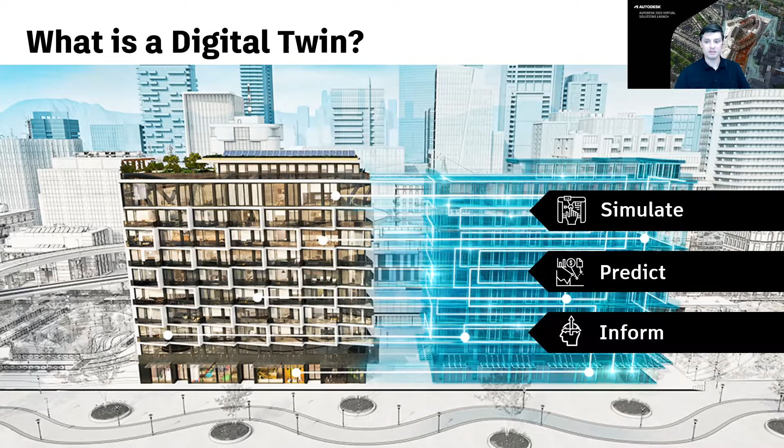As we think about a digital twin, they ultimately possess the opportunity to transform the built asset lifecycle. We can effectively transform that by tracking a digital thread of information that links various silos of data today, and ultimately connects operational data through an end-to-end digital process spanning capital planning, architecture and engineering, construction, and asset management.

By connecting through this digital thread, we think about the history of any given asset, space, or system within a facility and how we can leverage that history to drill into specific analytics, provide insights, and ultimately leverage this information across an entire portfolio or capital program to improve overall performance.

With that in mind, we think about things like: is my facility achieving the sustainability goals that I have set in place? And if not, what can I do to correct my course?

For particular systems, equipment, or material, are they performing based on the specified performance, and if not, are there other components similar or like in my overall portfolio? And what can I do to really future-proof any planning and ultimately optimize my ROI as I think about hitting my goals across a portfolio?

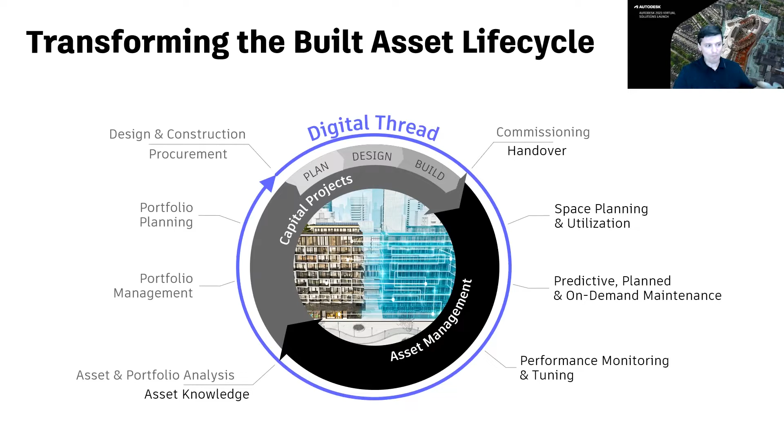As we started the Tandem incubation project, we looked across the industry for different information about how digital twins are leveraged and where the industry is with the adoption of digital twin technology.

To start, the descriptive digital twin possesses the as-built information related to the facility, coming from design and construction information. This is a collection of data that's captured through that design and construction workflow, and ultimately provided as part of that digital handover—that as-built documentation.

It is an editable version of that information, and ultimately you have the ability to maintain that through the life of the asset. It simply needs to be a collection of models that contain the assets or equipment, the spaces, the systems that are associated, and then you have the ability to manage the asset information requirement structure within that construct.

As we step up to informative twins, this begins to incorporate sensor information, IoT devices, and other connected components that bring in operational data, time series data, or event information, or otherwise, into the digital twin ecosystem, making them a single pane of glass.

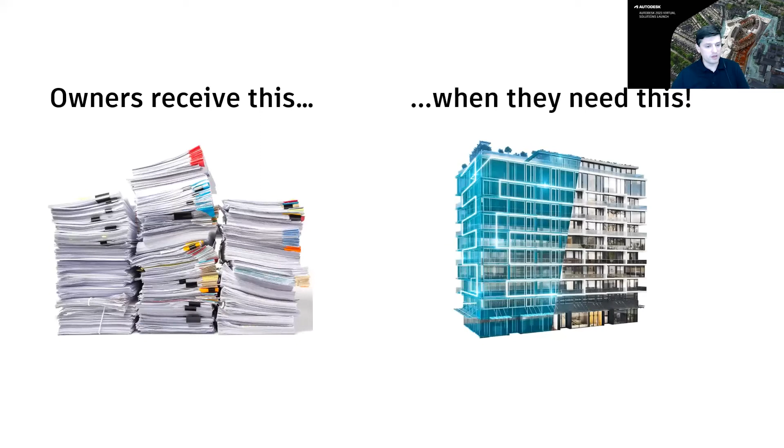Generally, when we think about that descriptive twin and the starting point, we frequently see that owners today receive a stack of unorganized or chaotic documents structured in a way that the construction team or delivery team handed them over, whether they're physically paper or digital paper in the form of large bound PDF documents that are disorganized and provided on a flash drive or otherwise.

As we think about handover in the sense of leveraging industry standards and structuring that data within a digital twin environment, we want to build a repeatable process leveraging them to transition that data into FM solutions or CMMS or otherwise capabilities. We'd like to see that materialized within the digital twin ecosystem, where today it generally is not. At handover, those mountains of documents are insurmountable or ultimately provide challenges in terms of operational readiness and leveraging that information from day one.

Typically, this is with a lack of transparency and provides poor insights into the asset performance for a long period of time until they can get up and running with that information.

With Tandem, we specifically set out an objective to create a solution organized around three key principles. First of which is accelerating operational readiness by starting with the end in mind, harnessing the BIM process to provide that digital handover, and create that digital twin.

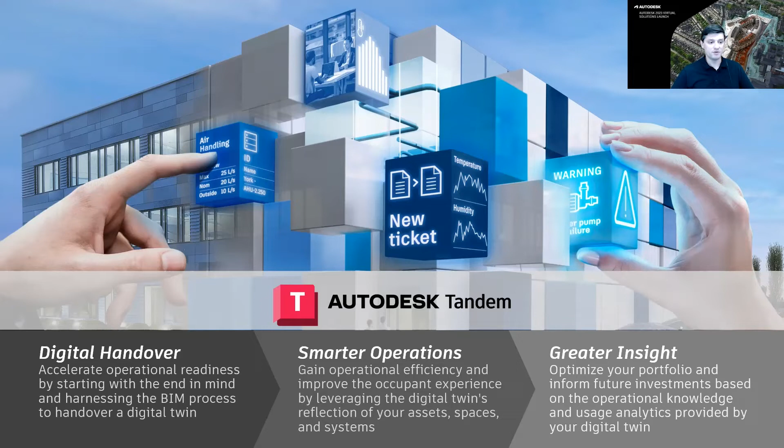Longer term, we expect to optimize portfolio performance by ultimately leveraging that analytical capability of a digital twin to inform future investments and drive further success with the utilization of digital twins.

Over the course of the past 18 months or so, our team has been focused pretty exclusively on that digital handover scenario. The way we think about this is start digital, stay digital, and deliver digital.

If we think about making a digital twin in today's collection of tools or in today's world, frequently this is a very bespoke process. With this digital handover capability and working with an existing BIM procedure, we would expect that a digital twin becomes a highly repeatable natural output from the project lifecycle.

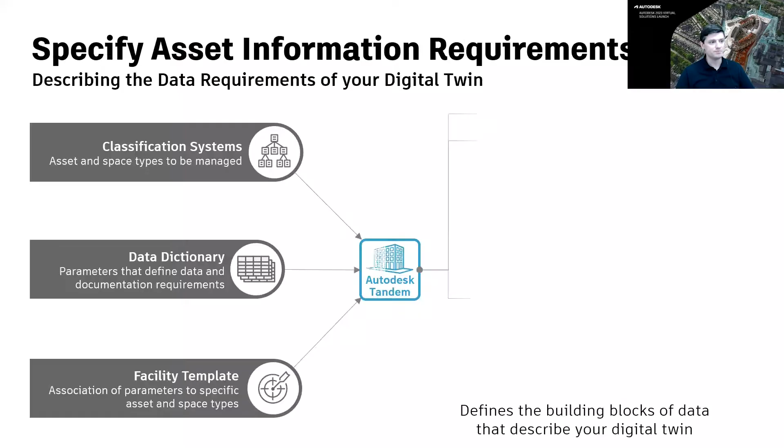So in Tandem, it all starts with specifying the asset information requirements of the digital twin. The first step is actually defining the asset breakdown structure and ultimately organizing that based on either a standard classification system, such as MasterFormat, Uniformat, or Uniclass structure, and those are typically how you're organizing design and construction specifications in today's world within the delivery phase.

Or that can be structured based on a custom classification system based specifically on the client's needs, or possibly even a legacy CMMS or IWMS solution.

Second, we're leveraging and extending a data dictionary, or a set of parameters as a library, that defines what needs to be managed within the digital twin. This can include simple values such as an installer's name or manufacturer's name, document links such as a connection to a warranty document or an O&M manual, or ultimately outcomes or specific values or metrics that you'd like to include with a given asset. With this, standards such as COBie or Building Smart Data Dictionary can be leveraged and structured in a way within Tandem that provides a foundation for those delivery requirements.

And lastly, within our facility template process, you can organize multiple templates that apply to multiple different constructs, allowing your team to deliver against specific facility templates, either for specific clients or specific building types that they can leverage again and again. Note that each of these constructs are reusable across facilities, and we also revision or version each classification system, each parameter, and each facility template, allowing you to deploy them over a period of time with multiple versions in given facilities as appropriate.

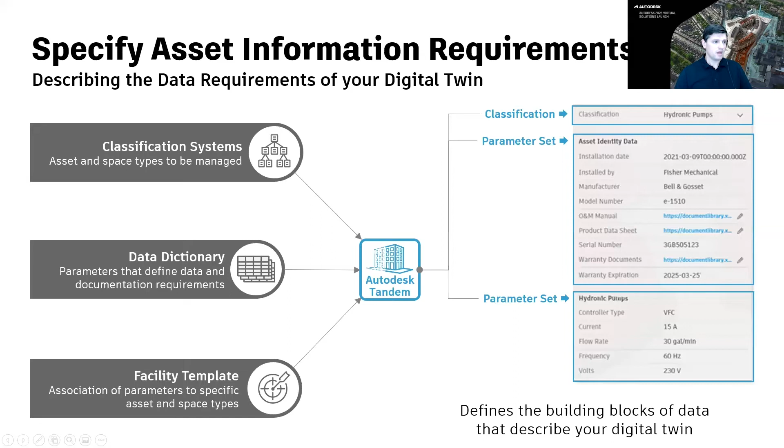As we think about that data capture, we ultimately expect this to be a broad funnel of information coming from a broad delivery team, and ultimately meeting the needs of a broader use case or utilization team that's spread across potentially facilities management, space planning, and operational workflows.

When we think about this structure within Tandem, it starts with that design intent, and it begins to build upon the as-built information and the commissioning data. And ultimately, as we think about verifying completeness of an asset, a space, or a system, we think about the requirements that were specified and how we ultimately go about capturing this through that delivery phase to ensure that that digital handover workflow is comprehensive.

So within Tandem, we do start with the foundation of BIM, or ultimately a collection of Revit or IFC models today. And we support those formats and expect to expand in the future, but that is going to provide the foundation of how we structure additional information.

As we think about capturing documentation or data, we ultimately interact with our common data environment, Autodesk Docs, and from there, BIM Collaborate, or BIM Collaborate Pro. And then lastly, as we think about capturing that installation and commissioning data, we have Exchange with Excel and the ability to interact either directly within Excel with that Tandem data, or an export-import process to and from Excel.

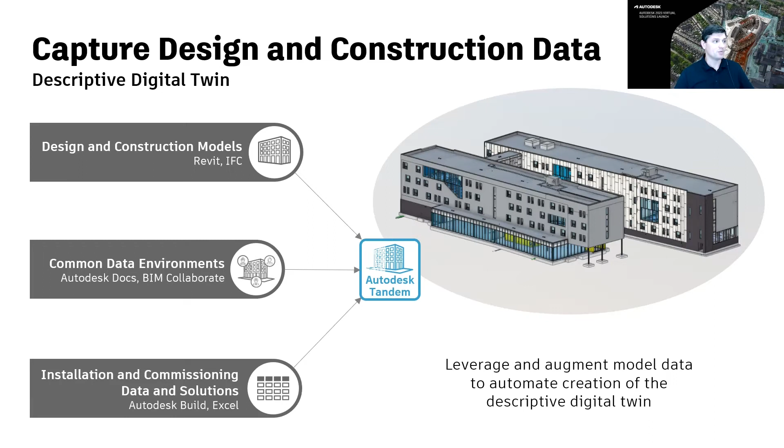As I previously mentioned, that structure of an asset information model is this description or association of assets to spaces and systems, or the relationship between assets, spaces, and systems. And within a given facility, this is important when we think about connecting to downstream operational systems like IoT devices.

Or ultimately digital twin ecosystem solutions such as Microsoft Azure, where it's important that we understand the ontology and the relationships between these things so that I can ultimately drill into a specific building graph and navigate upstream or downstream within a system when a space is too hot or too cold, and I need to understand potentially the impact from failing equipment or otherwise.

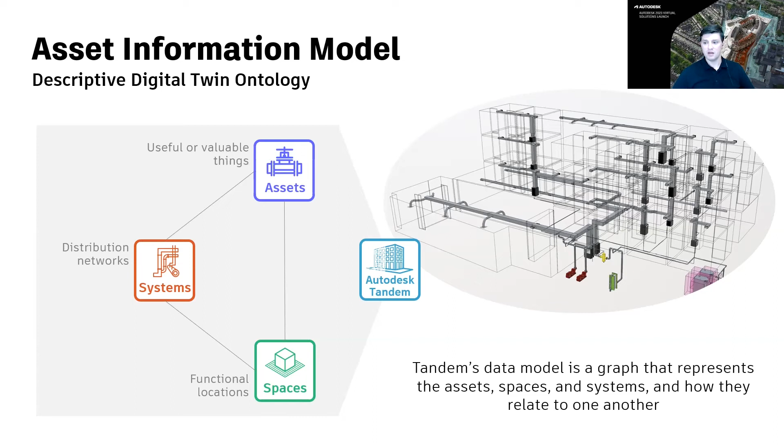With a building ontology, we're able to define that in an automated way. And with Tandem, we're working toward direct association and automation in how we think about assets associated to a space they're located within, and then ultimately the connection across the system and how those things are connected, so our users can navigate within that system to understand that relationship.

As we work to structure that descriptive digital twin as a foundation, this then shifts into how we'll put, in the next coming months, our focus into defining connected operational solutions and how we incorporate data from those operational systems into Tandem. So far we've talked about that context, and now we'll look at the connections made to drive digital twin use cases.

Within Tandem, we'll ultimately create these connections by linking our asset spaces or systems to operational data. We don't intend to replace existing operational systems or build our own IoT platform. Ultimately, we would expect to make connections to those existing solutions and open up or expose the Tandem information through a broader API, broader interaction in that sense.

With that in mind, we will work with popular maintenance management systems, building management ecosystems, IoT devices, and other operational data sets. Through these connections, we'll bring in real-time and historic information of that operational data, and we'll deliver that in a single pane of glass for monitoring and operating your facility. Our goal is creating an informative twin by correlating these discrete data silos and leveraging that in context to create actionable insights.

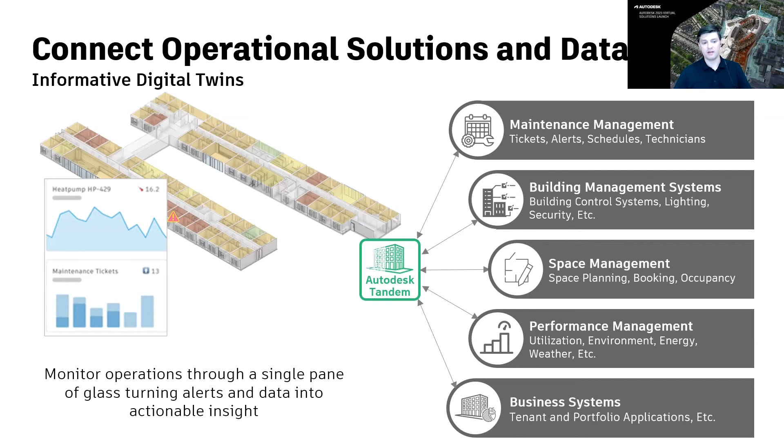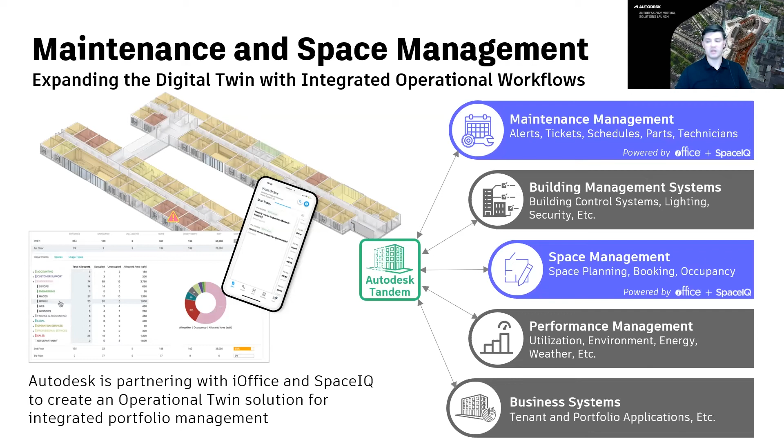With this in mind, last fall, Autodesk established a partnership with iOffice and SpaceIQ, which you may have heard through recent announcements. For customers of their solutions, we'd expect to build workflows with these directly and work with this partner to offer an integrated maintenance and space management solution through that Tandem experience.

Lastly, as we think about moving further into the future with Autodesk Tandem, we'll leverage that data to begin creating or enabling predictive twin, and that predictive capability set allows for analysis of desired outcomes against actual maintenance events and facility performance. Ultimately, Autodesk Tandem will be able to report against that asset, space, or system and how it's performing against expectations, whether better or worse than expected, and then allow our users to drill in and look at corrective course of action to improve that facility performance.

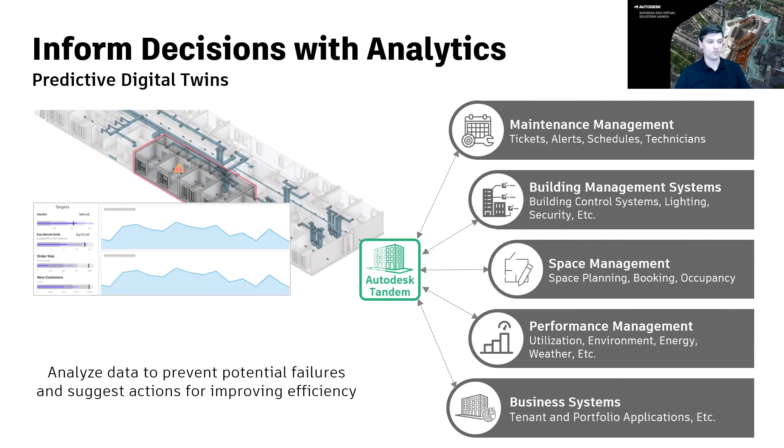To quickly wrap up, we'll step through a really quick demo and then our roadmap discussion. So quickly in Tandem, as we think about aggregating information within our ecosystem, it is a collection or federation of models.

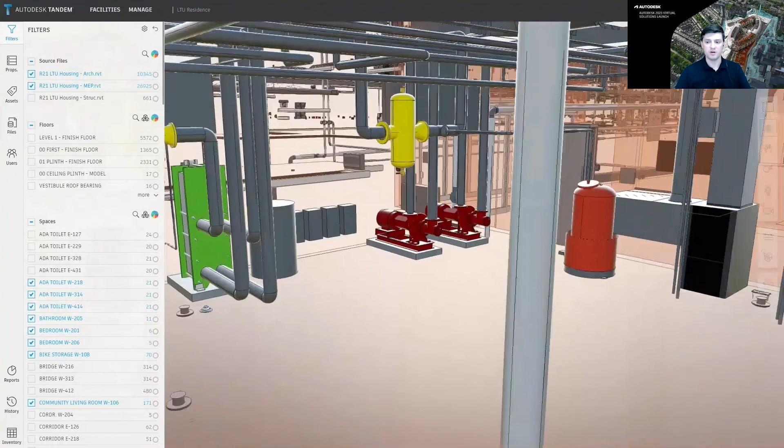From there, I can interact with individual components, search through that property data, specifically drill in on components and look at a diagram or otherwise, maintenance manual, et cetera, and then step out to associated equipment or systems and review performance across that system.

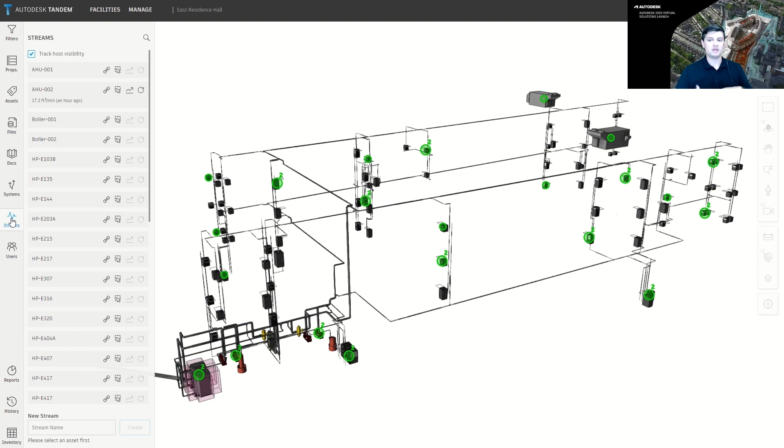As we think about connecting to that operational data, I have the ability to review that information and step through it over a period of time, or ultimately look at the history of that, searching for anomalies and making correlations as we look at that in context.

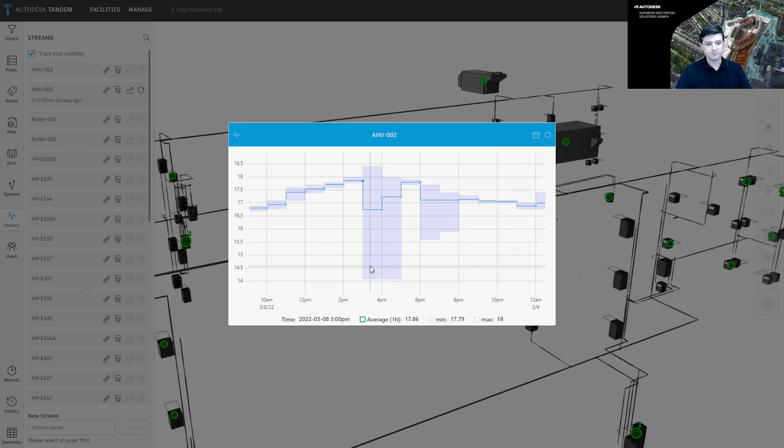As this information is connected and we have the ability to detect those anomalies, our connections to a maintenance management solution would trigger or fire off a ticket to ultimately deploy my facilities team to address the appropriate issue.

With the last two quick slides, we're going to step through our roadmap and our API structure here. With Tandem, as I described, our focus over the past has been on this descriptive twin, or twin building capabilities around structuring, gathering, and ultimately managing your facility data.

As we move into the near future, we're thinking about the process and developing our informative twin, for facility monitoring, simplifying that user experience for operations professionals, and driving to specific interactions with that set of insights. Then lastly, we'll move into that predictive twin capability, where we're thinking about rolling up data across a portfolio of facilities and providing analytics or insights to drive actions.

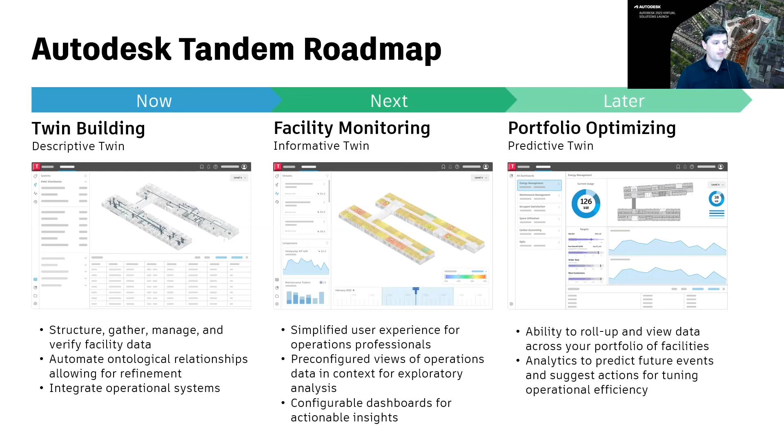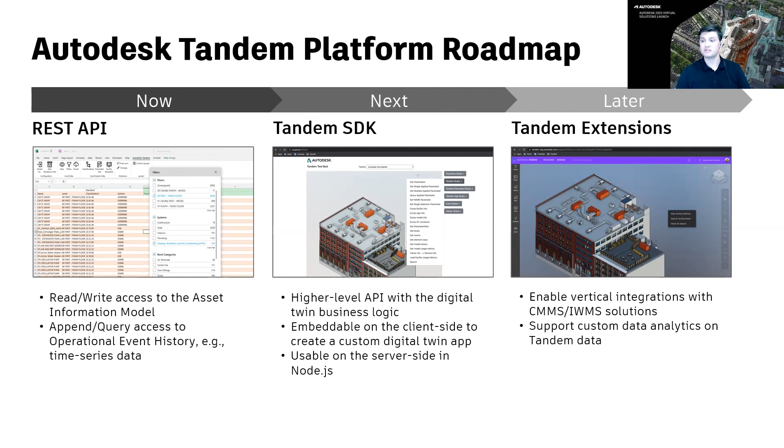With this in mind, we have a similar structure for our APIs, where today we offer a set of REST APIs where you can interact directly with the informative twin or that asset information model. In the future, we'll expand with higher level logic with our SDK, and later beyond that, we'll offer Tandem extensions to allow direct interaction with our application.